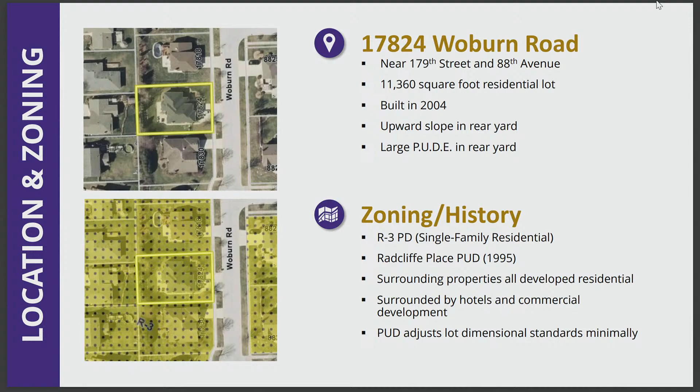Our zoning ordinance, section 3H1, creates different setback standards and placement requirements for a variety of different structures and uses. The code requires that decks be situated at least 5 feet from all property lines, but they may encroach into the required side yard setback. Swimming pools may encroach into the rear setback. They must be in the backyard, behind the rear wall of the house, and they must also be 5 feet from all property lines. The petitioner is requesting a 3-foot variation from the minimum distance from the property line requirement for both a deck and a swimming pool.

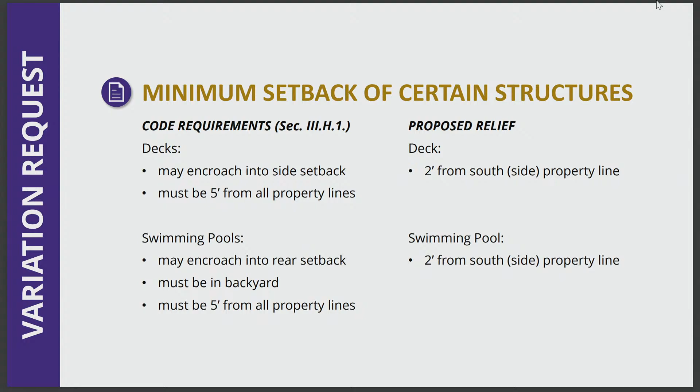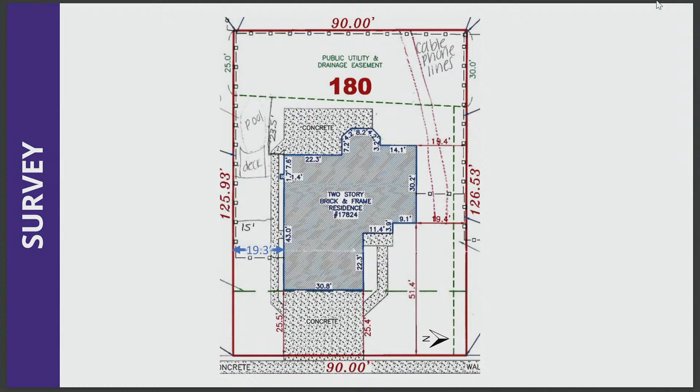Here is the survey for the property. It shows the large drainage easement in the back of the property, ranging from 25 feet to 30 feet in depth, so it's pretty substantial. The home has an existing concrete patio that takes up most of the buildable area in the backyard. The petitioner is hoping to place the pool and the deck along the south property line in the side yard.

The petitioner included this sketch with their request to diagrammatically explain it. They've got 19.3 feet between the south wall of the house and the south property line. There is a walkway there, so they don't want to build over or obstruct it. So they're proposing to put a 12-foot by 21-foot oval-shaped pool in the side yard, 2 feet from the property line.

They're also proposing to construct a deck for accessing the pool, shown here in yellow. The deck is the width of the proposed pool, and 10 feet in the other direction. They're proposing to add a lattice screen on the south side of the deck for a bit more privacy between them and the neighbor. This placement allows them to stay out of the easement, keep the pool in the backyard, and only encroach into the side yard.

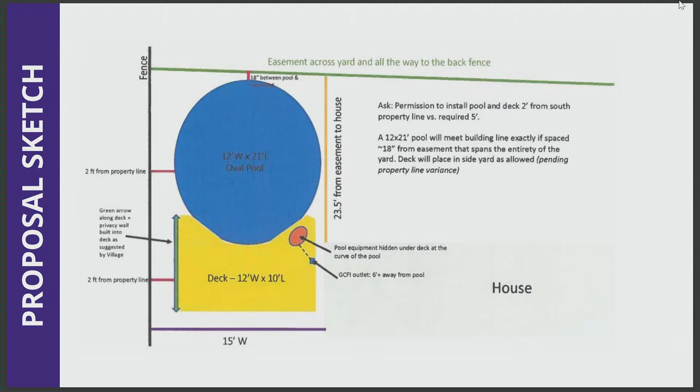To whom it may concern, I am writing to express my support for my neighbors at 17824 Woburn Road and their request to allow the construction of a pool and deck closer to the property line than is currently permitted. I believe that they have thoughtfully planned this with great consideration, and I fully support this variance request and respectfully ask that it be approved. Sincerely, Lucy Lamargo. She's the owner of 17830 Woburn Road, the house immediately to the south.

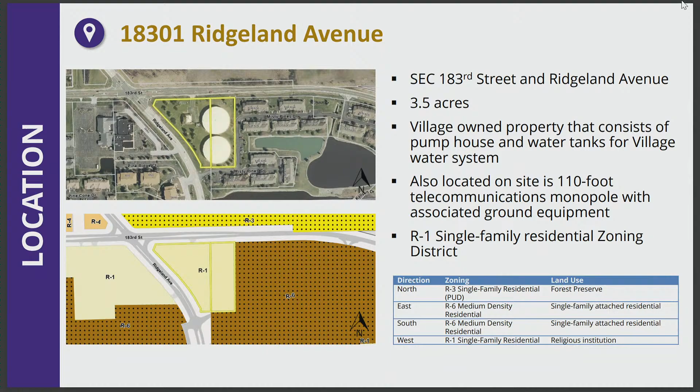I only say that because I know from the one street you don't see it, but from those pictures you can see there's a subdivision, and that's who would be looking at it. So, okay, fair enough. It would be from Ridgeland, driving past it, even with the landscaping there would be some visibility there. From the north you wouldn't see it because the existing enclosure would block it, and from the east the water tanks are in the way. But from the west, the southwest from Ridgeland, it would be in view.

Did they say they're going to be coming back to us again to get the final approval or something? No, this would be it if the plan commission votes to approve it. I think we're getting ahead of ourselves since we don't have a rep here to tell us what's going to be built so we can ask the questions, but I'm sure it's something the village could suggest further on, like what the materials are going to be.

Yeah, we can, as I said, we can make that suggestion, that we would prefer that they provide veneer or some sort of architectural enhancement on the wall. We could make that recommendation to them, but I wouldn't make it a condition. That's up to the plan commission.

I don't want to make it a condition, but I do think aesthetics would matter, right? The bottom line is whether it looks nice. I've seen some block walls or CMU walls look pretty cold, and then there's some that have a little bit of aesthetics to them.

Because we're just working with the wood fence as is, and I don't think the wood fence is attractive, so I'd prefer something a little bit better. Good point, the picture there isn't great. Could we flesh it out a little more, like a different color of CMU?

Does that fly a little more? Or the rough texture, the stone texture versus a smooth one? Can you guys discuss that a little bit so we can have something on the record for them? I'm pretty comfortable with staff's purview or review of whatever enhancement may seem reasonable.

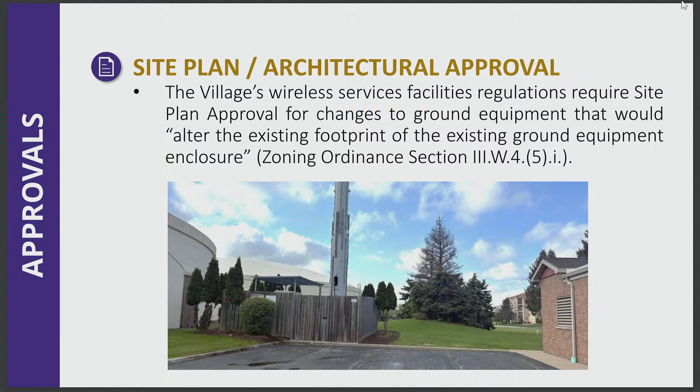Conditioned on architectural enhancement to be reviewed by staff. Okay, condition of architectural enhancement to be reviewed by staff. So somebody would have to read that into the motion. So at this time, if there's no other comments, somebody could read the motion with that added phrase in there.

I make a motion to grant the petitioner site plan approval for the expansion of telecommunications ground equipment area with masonry enclosure and landscaping at 18301 Ridgeland Avenue, in accordance with the plan submitted, and adopt the findings of fact as proposed in the May 7th, 2026 staff report, subject to staff review of an architectural enhancement. Second. Motion made by Commissioner Martinez, seconded by Commissioner Sepisi.

Lori, could you take a roll call? Commissioner Gaskell, yes. Commissioner Gatto, yes. Commissioner Hamilton, yes. Commissioner Manny, yes. Commissioner Merrick, yes. Commissioner Martinez, yes. Commissioner Sepisi, yes. Chairman Gray, yes. Okay, the motion is carried.

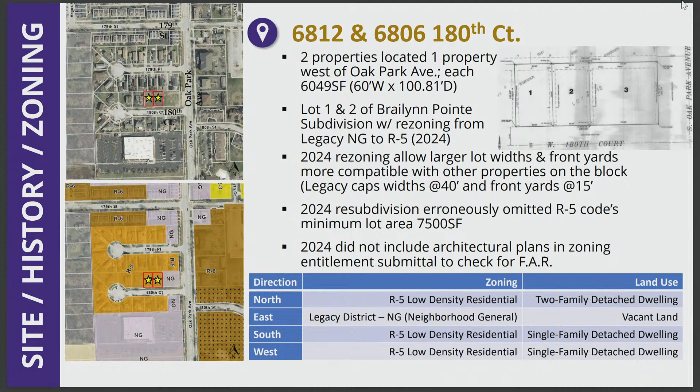As far as the zoning district, there are single-family detached homes along the block, and those are part of R5. R5 is also to the north, south, and west. On that block there are 11 single-family homes, all R5, with the exception of along Oak Park Avenue. On the cul-de-sac to the north, those are a series of two-family detached dwellings.

The existing properties on the block of 180th Court are a mix of two-story and split-level single-family detached homes. Using an aerial with a GIS approximate measuring tool, staff looked at the roofline rough building footprint and noted that one home, at the bottom left of the cul-de-sac, has a very large square footage and a large yard. It is a full two-story, and from a bird's eye view appears to have a basement in the back. Ignoring the basement, it appears to be about 5,400 square feet total on a 9,627 square foot lot. We don't have technical drawings, but it's likely a little bit over what the FAR would require for that zoning district.

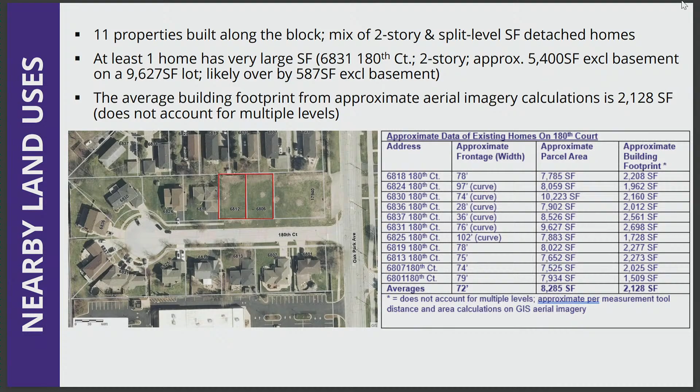So just to recap on code definitions and requirements for floor area ratio. Max FAR is more or less the numerical value that you get when you divide the gross floor area of the building by the lot area.

So the zoning code's calculation to do FAR, important distinction is gross, not usable. We have two different definitions. Usable will exclude many things. If we were looking at house sizes, for example, we would exclude garages and built out, not roughed-in areas of the basement, et cetera.

In this case, it's gross, so I'll read the definition, because this is relevant to the level of relief. The sum of the gross horizontal areas of the floors within the outside walls of the building, including basements, elevator shafts, and stairwells at each story, floor space used for mechanical equipment, penthouse, half-story, and mezzanine or interior balcony, and the gross floor area of any and all accessory buildings.

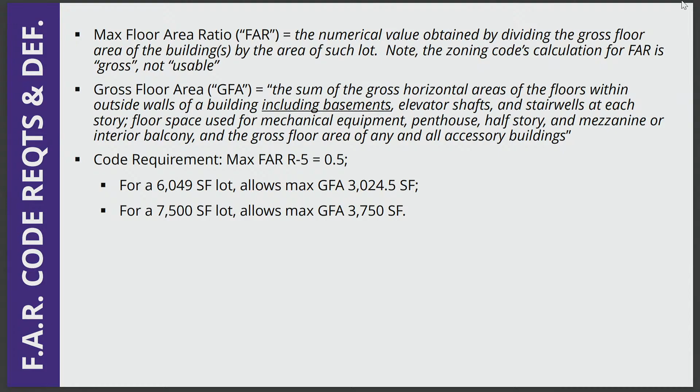So in R5, the max of doing that division to get the FAR is 0.5. So for these properties, the max allowable would be 3,024 and a half square feet. If it were a 7,500 square foot lot, it would be 3,750 square feet.

So here for the variations request, the petitioner, Mr. Spass, wishes to build single-family homes on each of these 2 lots, and just as a side note, does still conceptually anticipate townhomes on Lot 3. So the request is 2 variations. It's to reduce the minimum lot area allowance to build these homes, so a relief of 1,451 square feet.

And then this variation was noted due to permit review. When Mr. Spass brought in the drawings, staff discovered the lot requirement omission. So as part of this history for this relief, staff worked with the petitioner on adjusting the plans to be able to meet the code, otherwise as close as possible.

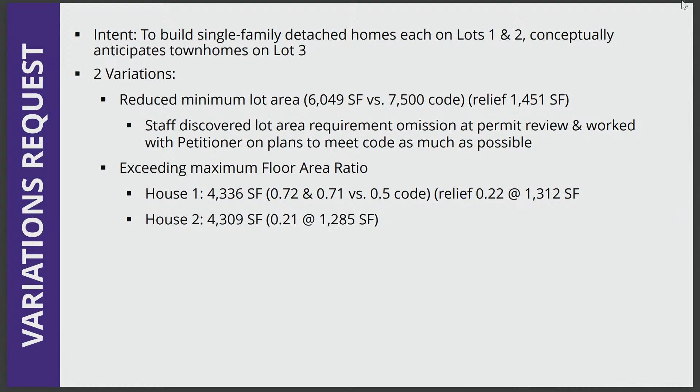So the only other variation, the second of which is max floor area ratio. So these homes are almost exactly the same. They're a little bit of tiny differences, but they're only about 27 square feet off from each other. So their relief, as you can see up on screen, I've got this detailed in the staff report, is a relief of about 1,300 square feet. So one of them is 1,312, the other is 1,285.

So this chart here, this table, you can see at the top of your screen, kind of itemizes all of this out, how much is on each floor, along with the basement and the total. So you can see they're about 4,300 square feet, and with the overage of the numbers I just read of about 1,300 square feet. So each of these homes are 2 stories along with a basement.

Basements these days are a typical market amenity for storage. So, as I mentioned before, that's part of the definition. So the basements here you can see in the table are 1,170 square feet. So that is the largely majority of the relief that's requested.

So basements, again, they can be partially or wholly below finished grade. So we have a 50% threshold that triggers something to be a basement, but for gross floor area, it doesn't matter. So if it's still fully below, it's going to count for FAR. So staff believes that such conditions are likely only minimally, if at all, contributing to the visible bulk, thus likely would not significantly affect the built environment and neighborhood character.

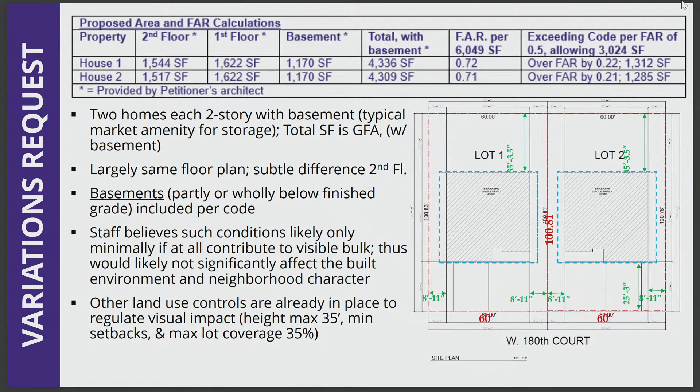Notably, there are other land use controls we have in our zoning code that help keep a lid on how big a property could go. So we have height, minimum yard setbacks, and max lot coverage. And you can see on the diagram here, the dashed blue line would be the minimum setbacks. So the house does meet those setbacks, plus it's set in a little bit more than required on the sides.

So as I mentioned, the majority of the relief is due to the basement. Notably, if the code were to be amended and not include basements in the gross floor area calculation, then the level of FAR relief would be reduced significantly. So you can see with house 1 and house 2, then the relief would only be 142 and 115 square feet each.

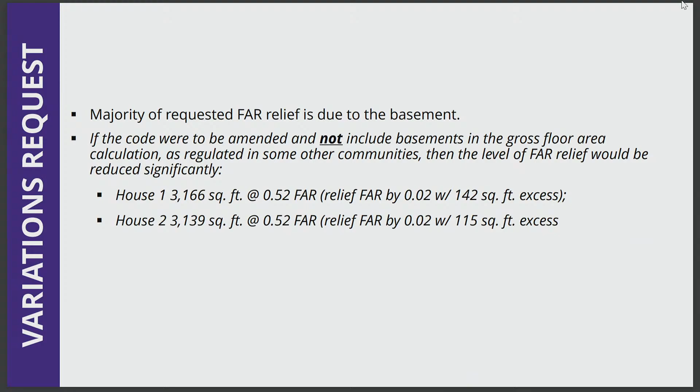So here's just some images that you would have saw in the staff report that show the houses. Staff notes other code requirements. We have facade elevation requirements for first floor masonry, as well as an anti-monotony requirement to make sure that it's not completely the same, that we do see some differences.

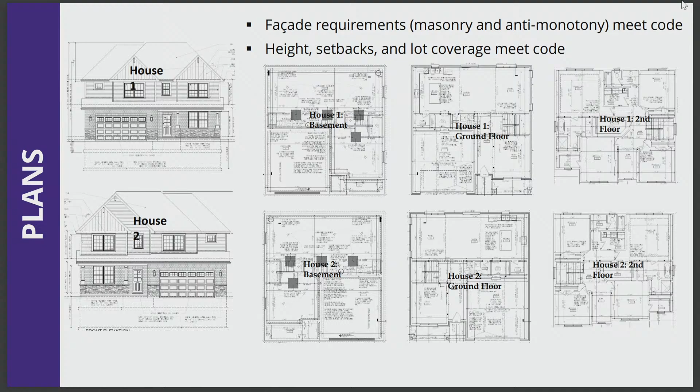So staff worked with the petitioner and the architect to have some of the roof line and the configuration of a couple of the rooms on the second floor, as well as the orientation of the driveway, adjusted.

So lastly, here are a few of the last staff notes, which are noted in the report, just for the consideration of evaluating the appropriateness of the request.

The building footprint is only 1,622 square feet, which appears to be less, based on that aerial analysis, than all but one of the existing 11 homes on the block. That average was about 2,100 square feet. Lots are slightly undersized, but the 60-foot lot width does meet code, and the depth of the lots are consistently aligned with the rest of the block.

Also, if the lots would have remained Legacy NG zoning, the max lot width would have only been 40 feet, and the maximum front yard only 15 feet, which would not be in character with the existing homes on the block. Lastly, the lot size appears compatible with the neighborhood and suitable for development, similar in character to the block's single-family detached R5 homes, while transitionally respecting the adjacent Legacy District.

That concludes staff's presentation. I have Paul Spass, petitioner, here. Okay, does Paul, would he like to come up and speak?

I'll swear you in. Sure, just state your name. Paul Spass? Paul, do you swear or affirm that the evidence you are about to give will be the truth, the whole truth, and nothing but the truth? I do. Okay, please proceed.

I don't have very many things to say. We bought the property a couple years ago, subdivided it. Like I said, it was in the legacy code originally, so it was a very large parcel. It's probably one of the last parcels of that size in the neighborhood.

After talking with the village many times on what their plans were, the legacy district is putting townhouses up in the front, and then on the Oak Park Avenue side, which is what we intend to do after we do these 2 residential houses in the back, just trying to stay conforming with the neighborhood in the back.

It's a cul-de-sac, so in regards to the FAR, it's only in regards to the basement. The houses pretty much meet what it is. The only difference would be, if you put a crawl space in there, it would still be the same thing. I think the FAR shouldn't really pertain to the basement.

I worked with the village on the lot sizes prior to the subdivision, and got recommendations on what they would like to see before I actually went through the complete subdivision. Other than that, as soon as we get these 2 houses up and sold, our plan is to conform with the rest of Oak Park Avenue and put a 4-unit townhouse project as the next phase.

Regarding the first standard about the property cannot yield a reasonable return if permitted to be used only under the regulations in its zoning district: the lot is slightly undersized to allow for development, but the lot frontage complies with code and the lot depth is consistently aligned with the rest of the block. The FAR and two-story bulk of the homes are consistent with the block. The existing homes are a mix of two-story and split level, and the proposed homes appear smaller than all but one of the existing building footprints on the block. The majority of the requested FAR relief is due to the basement. Both homes are equipped with a basement.

Number two, regarding unique circumstances and plight: the majority of the requested floor area is again due to the basement, and the lot depth is consistently aligned with the rest of the block. Thirdly, regarding not altering the essential character of the locality: the FAR and lot size appear compatible with the neighborhood and suitable for development, as they are similar in character to the block of single-family detached R5 while transitionally respecting the adjacent legacy zoning district, with the additional findings replicated above.

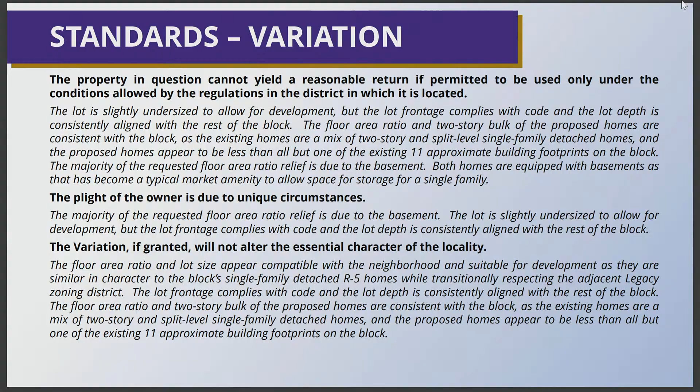I'll make a motion to recommend that the village board grant variations to the petitioner, Paul Spass, from Section VB Schedule 2 of the zoning ordinance to allow a reduced minimum lot size from 7,500 square feet to 6,049 square feet, and to allow a home on each lot with respective floor area ratios of 0.72 and 0.71, exceeding the maximum allowable floor area ratio of 0.5, on the properties located at 6812 180th Court and 6806 180th Court in the R5 Single-Family Residential Zoning District, consistent with the plan submitted, and adopt the findings of fact as proposed in the May 21st, 2026 staff report.

Do we hear a second? Second. Motion made by Commissioner Hamilton, seconded by Commissioner Manny.

Lori, could I get a roll call? Commissioner Gaskell? Yes. Commissioner Gatto? Yes. Commissioner Hamilton? Yes. Commissioner Manny? Yes. Commissioner Merrick? Yes. Commissioner Martinez? Yes. Commissioner Sepisi? Yes. Chairman Gray? Yes. Okay, the motion is carried.

So this will go to the village board on June 2nd, 2026. Mr. Spass, just get with staff on the time and place. It should be here to attend. Okay? Good luck here.

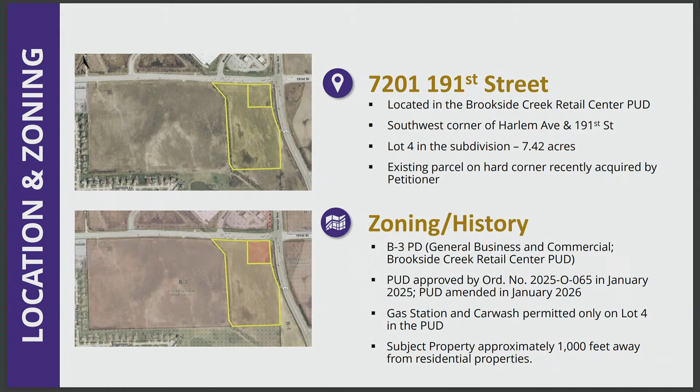The total area is 7.42 acres. The PUD was approved at the beginning of 2025, and then we amended it in the beginning of this year to move the allowance for a gas station in the PUD from Lot 1 to Lot 4, where it is now. I'll note that the subject property is located at least 1,000 feet away from residential properties in the neighboring Brookside Glen development.

There are three requests that comprise the proposal. The first is a special use for a substantial deviation from the PUD. To facilitate the project, the petitioner needs to amend the PUD boundary to include the corner parcel, to approve the land uses, and to grant certain relief from the zoning ordinance and landscape ordinance. I'll get into those specifics in a moment.

The second request is for final plat approval of a plat of consolidation to merge Lot 4 and the parcel on the corner, and then site plan and architectural approval.

The first part of the special use request is to amend the boundary. This is very straightforward - they are just going to extend the boundary to include the corner lot. So everything on screen will be within the Brookside Creek Retail Center, and it will all be zoned B3. The corner is currently B3 as well, so there's no rezoning needed.

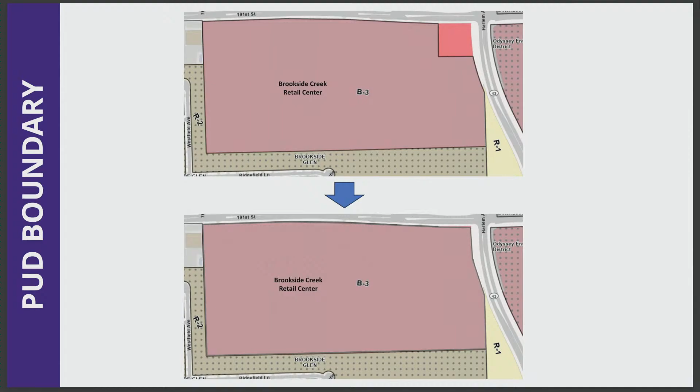So the proposed uses on the property - this is kind of like a typical gas and wash location where there's a lot of different things happening. The fueling station component: they're proposing to have 18 fuel stations. The convenience store building is a 10,049 square foot gross floor area building.

Within that building, there will be 2 counter service food and beverage vendors, likely a coffee shop and a quick service restaurant. Each of those food and beverage vendors would have a drive-through lane, and then they are also proposing to allocate about 1,900 square feet of the convenience store building to a separate retail suite - an inline tenant user that has yet to be identified.

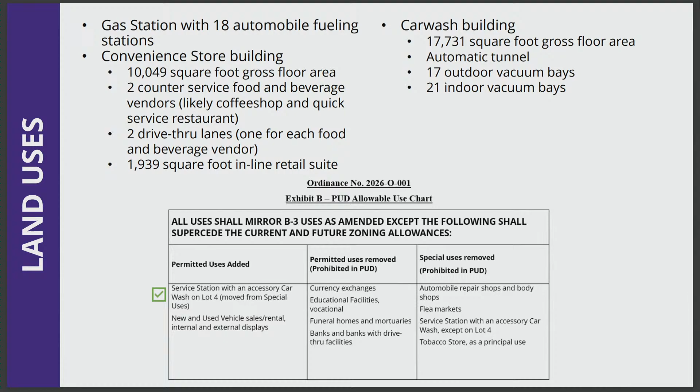But then they are also proposing to have a detail center, which would have 21 indoor vacuum bays. The petitioner is here to speak a little bit more about how they're proposing for that to work, but it's my understanding that some of those stalls would be used for detail service, kind of like what Delta Sonic does. And then some of them would also be just for motorists to vacuum out their cars themselves in inclement weather - they can be indoors while doing it. It will also include the typical outdoor vacuum bays.

So the second request that they're making is for the final plat of consolidation. Up on screen I have a snippet of the meat of the plat. They are proposing to consolidate into one lot, 7.42 acres. That far exceeds any minimum requirements we have for B3 lots within the village in the zoning ordinance.

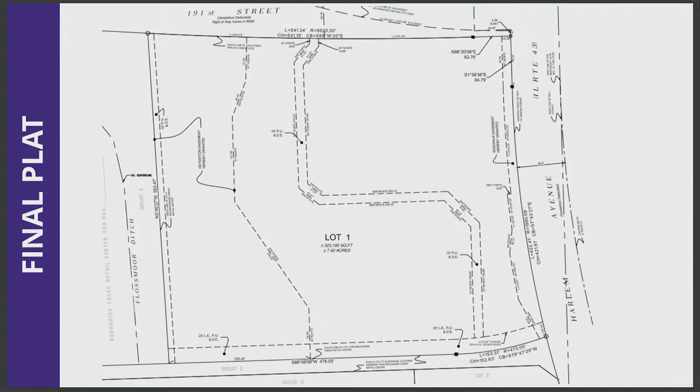They have several easements indicated on here. The one on the right along Harlem is for a sidewalk, and I'll get into that a little bit more in a moment. The one that kind of snakes through the site has to do with the alignment and orientation of the utilities moving through the site. And then on the west, that is a drainage easement.

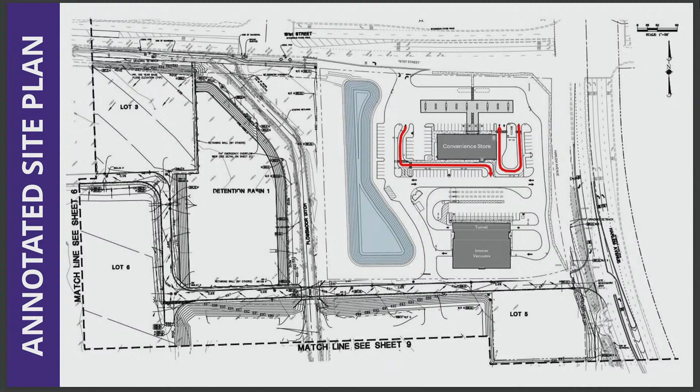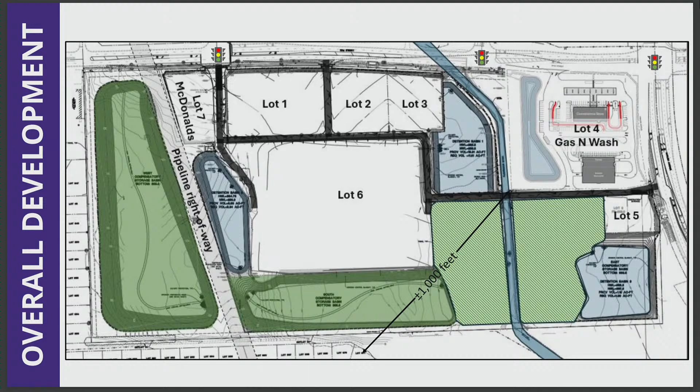I just wanted to highlight that they did consider navigating the site. They provided a vehicle turning exhibit that shows how a tractor trailer and a fire truck would navigate throughout the site, and also shows how motorists would access the drive-through lanes and fueling bays. I know we have a few small details to discuss with the turn radii and all of that, but I think it's generally relatively minor. So what you have before you is reasonably what you would be approving—there won't be any major changes, but there may be some small tweaks.

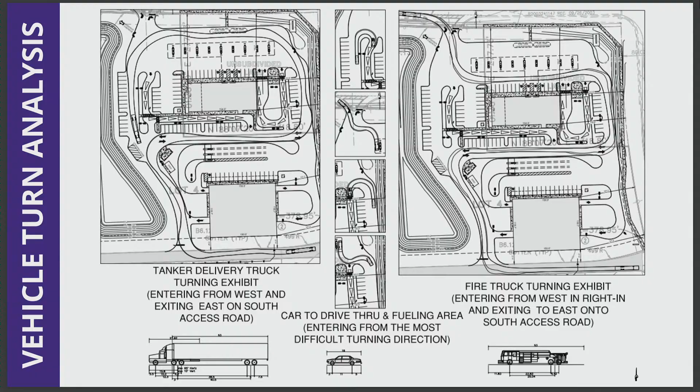For the architecture, this building is going to look maybe exactly identical to the one on 183rd and LaGrange. This is the convenience store building—it is almost entirely masonry, with a stone detail at the bottom. They have the articulated roof line, and the branding color, the bright red, is kept to a minimum and is used just for architectural detailing.

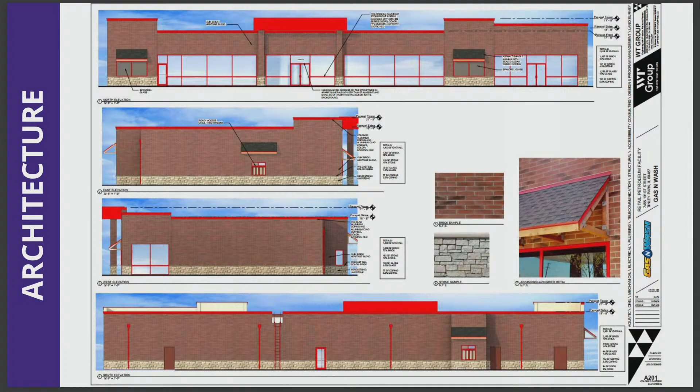Yeah, this is what we're used to seeing. And then for the car wash building, this is a new concept, so it's a little bit different.

They're proposing to use Hardie board siding, which we as staff have been considering an approved material because it is hard wearing, has higher longevity, and lower maintenance. So we've been thinking of it differently than vinyl or wood siding. Even though the visual appearance may be similar, it's a much harder wearing material.

We're generally thinking it's in line with our requirements. They do meet the facade composition requirements when you subtract out all of the glazing. And this building is compatible with the convenience store building, sharing the same materials, with the exception of the Hardie board siding, and the same color scheme.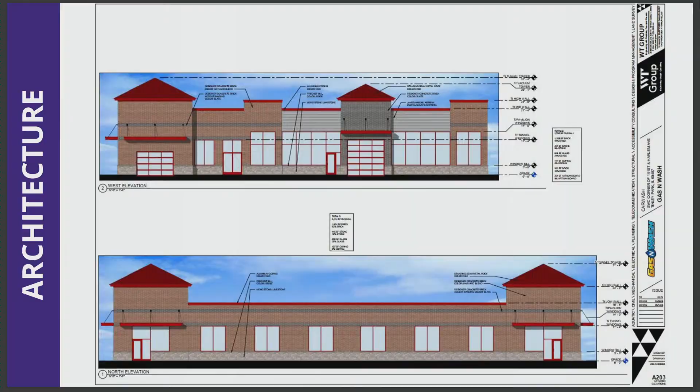For landscaping, the site is very heavily landscaped. However, it is still deficient with the village's landscape ordinance requirements. The intent of the ordinance is to provide shade and native plantings, add visual interest, and soften the visual impact of development, and I think this can reasonably be considered to do so.

The village landscape ordinance specifically requires a type C buffer yard along each property line. They were only able to achieve the requirements of the type C buffer yard on the west. On the north and east, it is a little bit constrained due to the location of easements, overhead utilities, and drainage swales. So they have met the width of the buffer yard requirement, but they are deficient in the number of plantings.

For example, the north buffer yard requires 22 canopy trees; they're proposing 9. The east buffer yard requires 18; they're proposing 6.

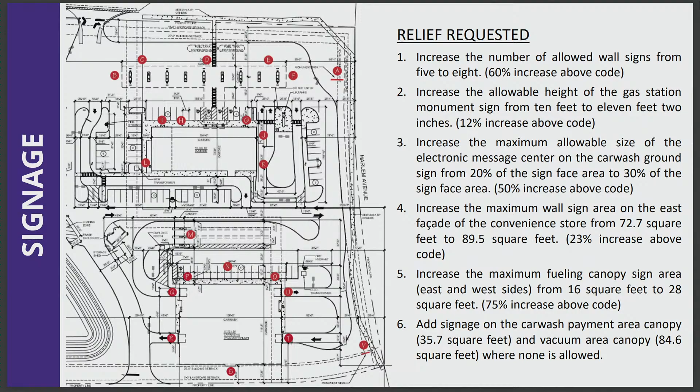As I noted, all of these requests are consistent with the variations approved by the village board for the 183rd and LaGrange location, so this is in line with other locations in the village. All signs not specifically listed will otherwise completely comply with signage regulations in the zoning ordinance. So these are the only 6 requests we got for signage, and these are the only 6 that would be granted. Anything else would need to align with the zoning ordinance.

Here's just an example of the car wash signage. You can see that they've got car wash called out separately from detail center. That's kind of in line with having 2 separate uses, even though they're one business operating the use.

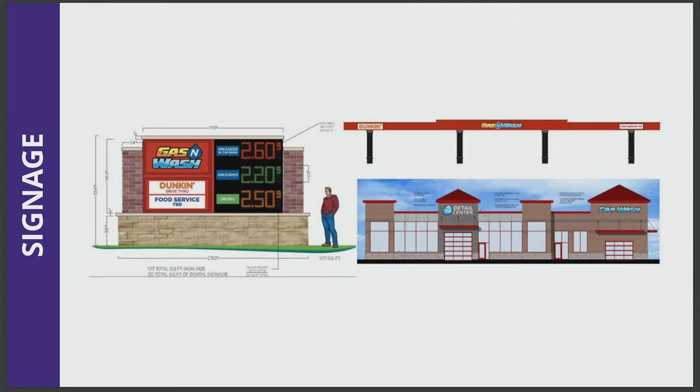I'll quickly note too that the lighting plan that was submitted, the photometric plan, meets all village requirements. The fixtures are downlit, and the foot candle spillover is within our regulations.

The orientation of the site really does a lot to address lighting impacts to residents. The most impactful would probably be the gas station canopy being lit up all night. Because of how the site is laid out, the convenience store building will block all of that spillover to the south, and there'll be heavy landscaping on the west. So the impacts are mitigated, and regardless, they are in line with our standards anyway.

Yeah, got the standards. Okay.

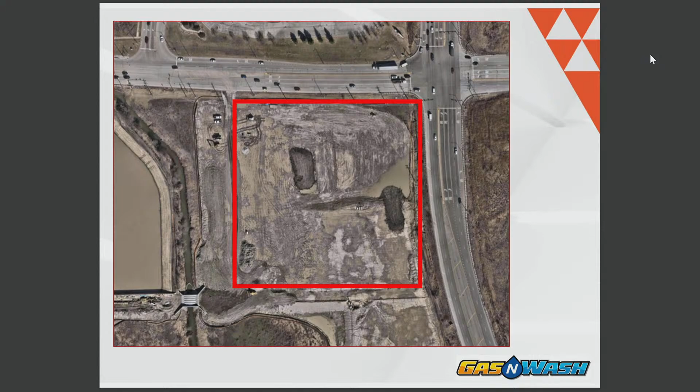Again, that's our site plan. Go to the next one — it should be the colored site plan. In that site plan, you can see the variety of landscaping. We are using coniferous as well as deciduous.

Any of the variances that we're asking for, like along the northern edge of the C-store, is directly where our customers are walking and have found historically difficult to make any landscaping viable there. On the east side of the C-store is literally the drive-through lane, which cars are driving through, so it couldn't be done. However, the quantities required in those areas are not being removed from the site — we've taken those quantities and placed them elsewhere on the site.

That's why we're 5,000 square feet over the required landscape bed area, and we just want to make that clear. All our interior landscaping meets your ordinances, and we're asking for variances on the outside because of physical requirements in terms of the overhead utilities, the underground utilities, and very specifically the drainage swale along Harlem, which really affects what we're trying to do.

Overall, you can see that we are heavily landscaping. We do have a variety of the coniferous and deciduous landscaping. So just in general, going from top to bottom is the auto canopy. It's an inline canopy with 9 islands, so you fuel on both sides — that's where the 18 fueling positions are occurring.

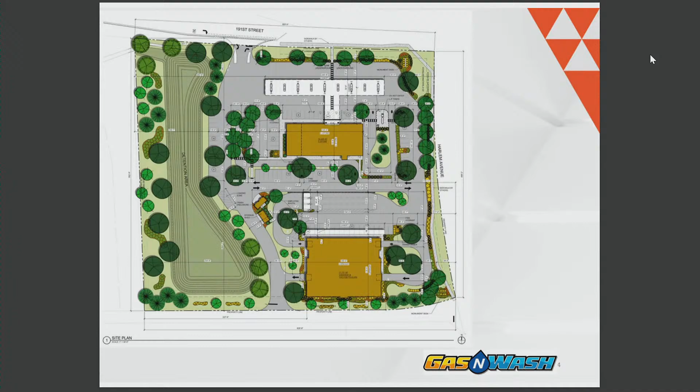With that, we also have Mr. Mike Hackett in terms of answering any questions from a business side, and then Mr. Brian Hertz from any civil engineering side. We'll quickly go through the rest of the slides just to show you some comments, but that was the gist of our presentation.

All masonry bearing buildings, both of them, 100% masonry bearing, high quality materials, long lasting for the environment.

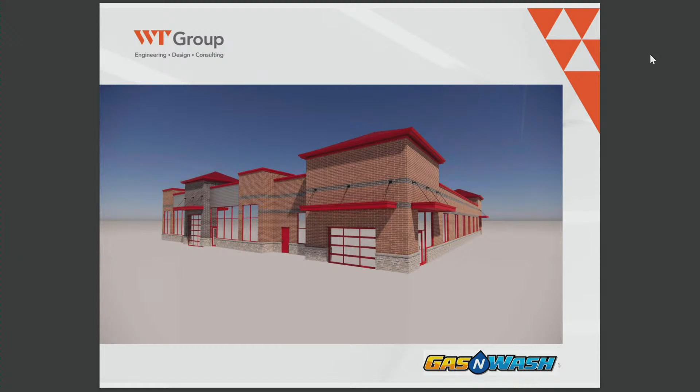Next, this is a perspective of the car wash pavilion. On the right side is the traditional car wash where you drive through, and on the left side is the detailing center. This is another view from the west side looking southeast, showing the southeast corner of the building.

It's made to have a lot of natural light and all masonry. The artisan panel we're using is only above the windows, for a contemporary look. The artisan has a nice groove that gives a delineated line, a more modern feel, a clean look, which is what we want to reflect in this car wash and detailing facility, since people are trying to detail and spruce up their second most costly investment in their lives. So we feel the building wants to dress up a little bit at that point as well.

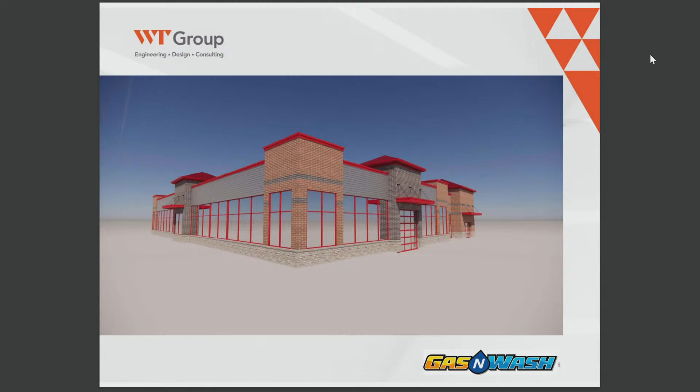Next slide, I think that might be yet another view, and then we have the site plan. So we are here to answer any questions, and we thank you for your time. I spoke way too long, sorry.

Thank you, Christian. I want to make sure I heard that right. This one's different in that, as staff's wording says, it's to develop an automobile service station. So those pumps are really just for garden variety vehicles, right? There shouldn't be a tractor trailer type truck coming in, it doesn't look like it would fit that, it would cause some issues, right? So is that what you were saying, just typical commercial clientele? Correct. We're not at all offering a commercial fueling lane canopy, which is what you see in other properties within the village and throughout the area.

Okay, and I want to make sure with staff too, the FAR, we had it in the last one, and this is a little different. It's the gross floor area of the buildings divided by the area of the lot, right? So that area of the lot includes the detention pond, which is effectively unusable, but that's in your denominator, right? So that's almost a trick of math, because there's nothing buildable on that, you get a big denominator, so it reduces that number. So it's in fact actually making it more dense in that area, is my estimation. But I just wanted to say that because I'm an engineer, so I'm a math guy.

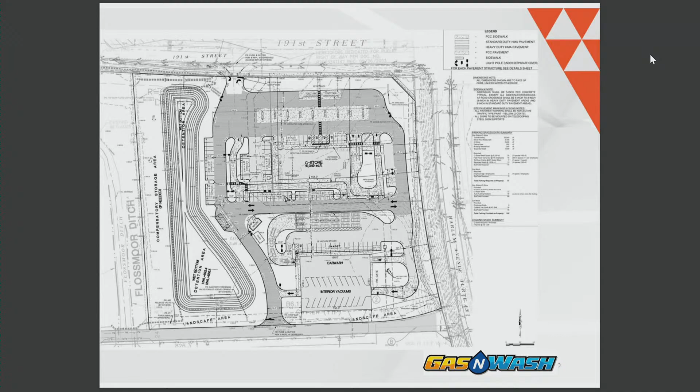Go ahead, Kristen. I just wanted to bring that up about the denominator. Yeah, this is a typical gas station in terms of every gas station requesting a variance for foundation landscaping because of the function. Landscape ordinances and zoning ordinances are all written for the general good, but then when you get a specific case of a certain business type, there are certain situations that need an exception to that.

And this is because people would trample landscaping walking from the doors, from their parking to the front door. Again, we're not avoiding it in terms of not putting it on the site, we've relocated it on the site. So we have 5,000 square feet of additional planting beds over what's required, and the only place we're short on landscaping is because of the drainage swale and the utilities and the overhead lines as well.

So the site is going to be beautiful, impeccably maintained as all the gas stations and washes are. And the services are similar, and it's a reflection of the market. Your retail here is the highest per square foot of any use in the retail environment. A retail fueling facility per square foot generates the highest sales tax revenue, which reflects the highest amount of sales per square foot. So if you want retail, this is the best use, not the least use.

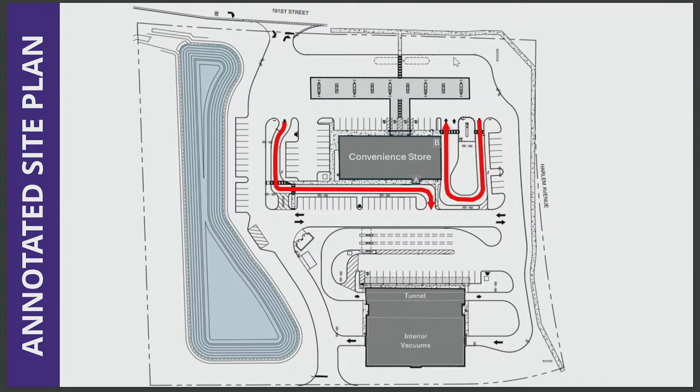Any other comments from the commissioners? One last comment, Gary? I do think it's probably a little bit unfair for us to bring up that it's too busy now, because we already looked at this one time in the same general area and approved it. I think there's a little bit of unfairness in that.

And if I need to get more specific into each of the signage requests, I can, because the height—all the signage requests are exactly the same as other sites, and it's all a function of the businesses wanting to identify them. I don't know how to stress it more than to say that we can meet your code perfectly. We can have 400 more square feet of signage, we'll get the same amount of numbers and all that. Our ID signs will grow by 180 square feet.

Is that really what you want? I don't think so. So we are just trying to put the signage where it's appropriate—identify the auto fueling, identify the 2 QSRs in the convenience store, identify the convenience store, and identify the retail user. That necessitates a number of signs. But again, we're 400 square feet less than what's allowed by code, so I think it is a peace offering—a positive thing that we're doing less signage than what's allowed by code. And we feel it's more harmonious to the design of the site.

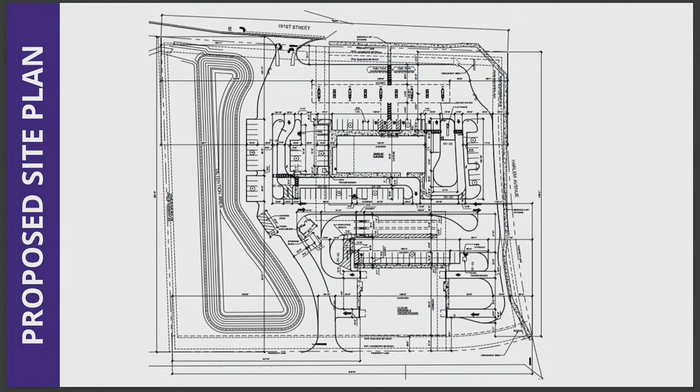Anybody else have any other comments from the commission, or even the staff?

I know I've been talking a lot, but some of the things you're speaking to, some of those variation requests, I actually do prefer that you meet the locations that the code is intending for you to put. For example, the landscaping, or the variation request to just go 1 foot higher on the monument sign. I just want to put on the record, I do prefer the code's intention on some of those.

And I also second, like, I hear all this stuff that we're giving you back and all this other stuff, so do we need to revisit all those too? I mean, it sounds like we have to revisit. Are we totally in the, if it is just a ratio, I concur with Christian on the fact that, staff, I think everybody here is in agreement, yeah, you can get around it by having a monstrosity, but that's not the intent of the code, right? So smaller, but still visible from the roadway is what would be the meaningful intent of any sort of code for that.

But if it's any wiggle room or gray area where people can work around that, unlike other times where we say, oh, well, then do that first, and then we wouldn't want them building a big sign. So what is staff, in terms of any recommendations on future plans to even look at that?

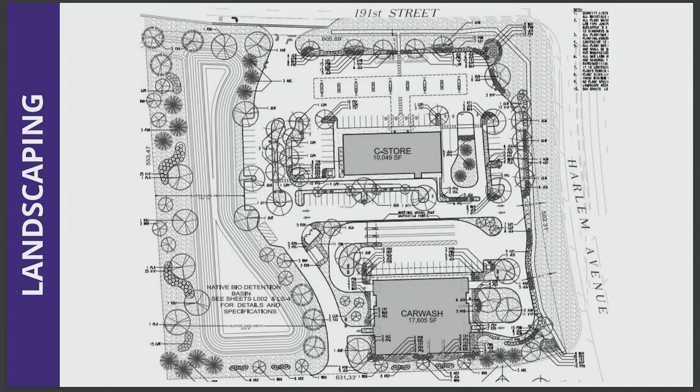If there's no more comments, before we get to the standards, I just want to reiterate there's 3 motions for this. Motion 1 is the special use for the substantial deviation from the Brookside Creek Retail Center PUD. Motion 2 is the final plat, which I believe is the consolidation of the 2 properties. And then motion 3 is what we've been talking about right now, the site plan architectural approval, right?

So I just wanted to reiterate that when those come up for clarity. But is there any more comments from anybody from the public wishing to speak? And then anybody from the commission, or the petitioner's team, willing to have any last words here? We're good. Okay, with that said, I'll ask for a motion to close the public hearing on this.

Make a motion. Okay, Commissioner Gaskell, seconded by Commissioner Gatto. All those in favor of closing the public hearing, say aye. Aye. Opposed? Okay, the public hearing is closed, the motion is carried.

We'll go on to the standards then, and you gentlemen can sit. The standards for special use approval: that the establishment, maintenance, or operation of the special use will not be detrimental to or endanger the public health, safety, morals, comfort, and general welfare.

Proposed special use will not be detrimental to the village, its residents, or visitors. That the special use will not be injurious to the use and enjoyment of other properties in the immediate vicinity for the purposes already permitted, nor substantially diminish or impair property values within the neighborhood.

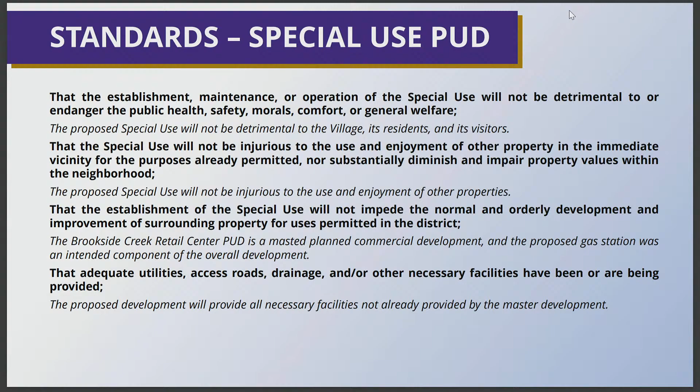Brookside Creek Retail Center is a master planned commercial development, and the proposed gas station was an intended component of the overall development. That adequate utilities, access roads, drainage, and other necessary facilities have been or are being provided. The proposed development will provide all necessary facilities not already provided by the master development.

That adequate measures have been or will be taken to provide ingress and egress so as designed to minimize traffic congestion on public streets. All vehicle access points are designed to minimize traffic backups onto public roadways, and sidewalks will be provided.

Conform to the zoning district regulations. All requirements will be met. That's conform to the B3 zoning district regulations. All requirements will be met.

And the extent to which the special use contributes directly or indirectly to the economic development of the community as a whole. Proposed development will activate a long vacant parcel in the village and provide property tax and sales tax revenue.

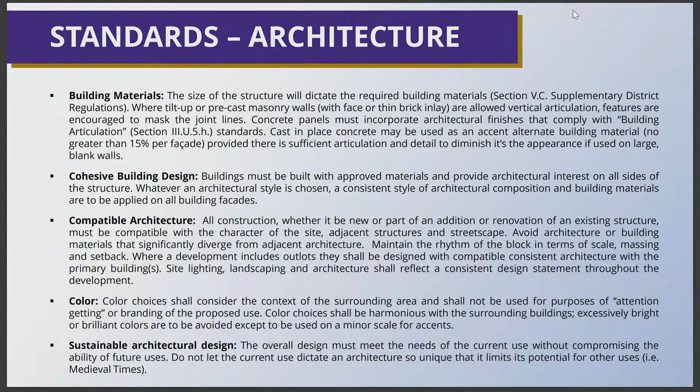And I have the architecture and site plan standards. We do not have a set of standards for plat approval, but it's basically if the engineers are okay with it and it meets the zoning minimums, then it's good to go, and this does.

Okay, thank you, Michael. At this time, could I get a motion regarding the special use? I make a motion to recommend that the village board grant a special use for a substantial deviation from the Brookside Creek Retail Center PUD to the petitioner Leonard McHenry of Gas N Wash to construct a gas station with a convenience store and car wash at 7201 191st Street in the B3 PD General Business and Commercial Brookside Creek Retail Center PUD zoning district, in accordance with the plan submitted, and adopt the findings of fact as proposed in the May 21st, 2026 staff report, subject to final engineering review and approval.

Do we have a second? Second. Okay, motion made by Commissioner Martinez, seconded by Commissioner Sepasi. Lori, could I get a roll call?

Commissioner Gaskell, yes. Commissioner Gatto, no. Commissioner Hamilton, yes. Commissioner Manny, no. Commissioner Merrick, no. Commissioner Martinez, yes. Commissioner Sepisi, yes. Chairman Gray, yes. Okay, the motion is carried.